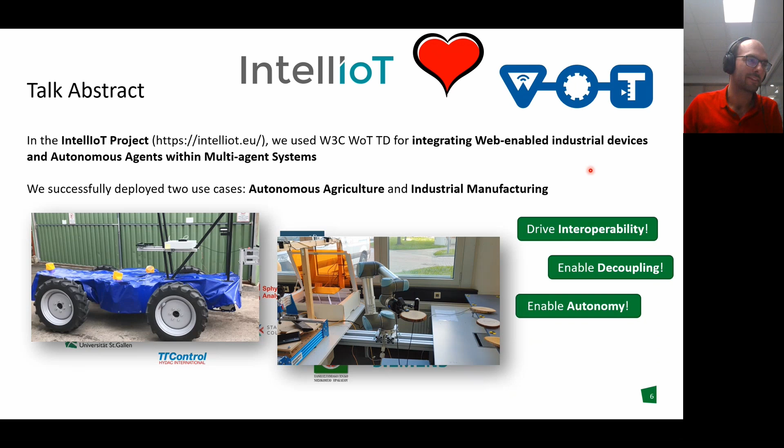So as an introduction, I'll show you the most recent videos. This is the video from last week, the most recent videos as outputs of this project. What you're seeing here is not the Postman interface, that's not the interesting part.

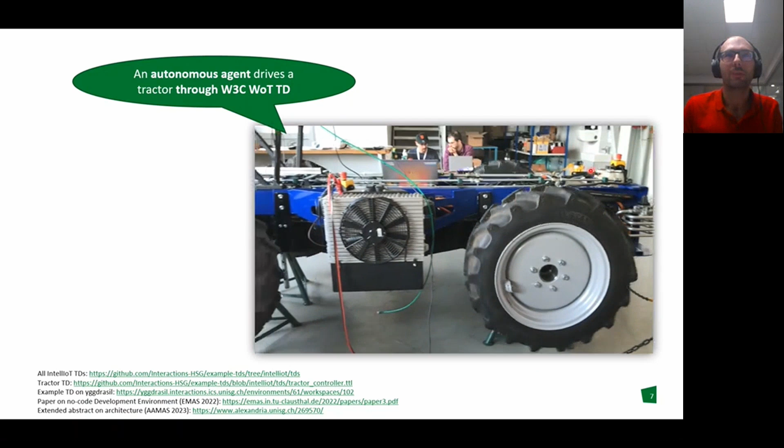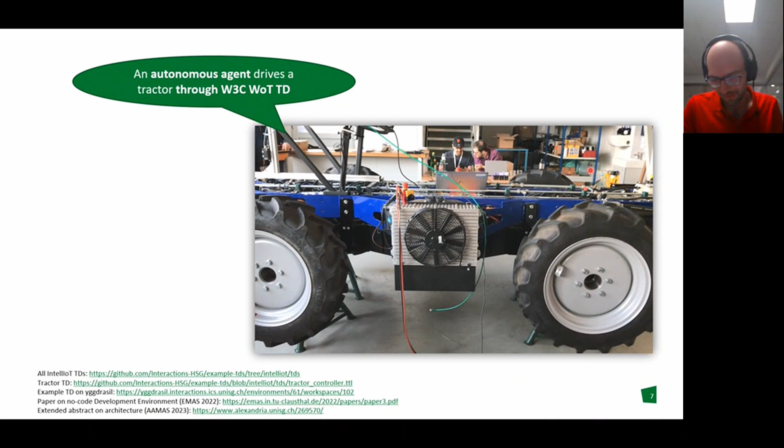What you can see here is our successful integration of an autonomous agent that drives a tractor through W3C Web of Things thing descriptions. One question I don't know is why the front left wheel doesn't move, so please don't ask me this. This tractor is up on the scaffold, so it's not actually driving, but it is following GPS coordinates.

This is enabled through things that expose WoT TDs. Some of these things are a tractor controller, the driver of this tractor, a waypoint service for resolving GPS coordinates, for giving us the next waypoints, for resolving fields to be harvested to GPS coordinates. An AI service, a local service that enables the tractor to go around obstacles, a journaling service, and a human-in-the-loop service that kicks in when the AI service fails.

Okay, so this is the, and there's many more, right? If you want to look at all the TDs that are active in this scenario, down here is a GitHub repository with all our IntellIoT TDs that you are free to browse.

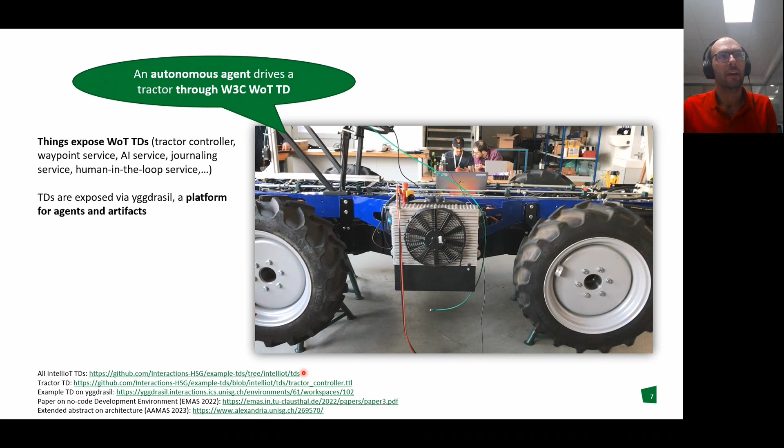These TDs are then exposed via a platform for agents and artifacts that we refer to as Yggdrasil. I can show you a quick demo of how this would work.

So over here you see the Yggdrasil platform, a specific workspace in that platform, and this workspace exposes, for instance, the action affordances make artifact, which tells us that I can create an artifact at this workspace. Some such artifacts are already created. One of these is a robot in our laboratory. So if I go and dereference that robot, I get a thing description of that robot.

This enables me to steer this robot. The actual TDs that we were using in IntellIoT, the tractor TD is linked from here, and all the other TDs are available, as I was saying.

Now, what is interesting about our project is that what we did was we discovered these TDs at runtime. So they were registered in this platform at runtime, and then we discovered them through a no-code development environment.

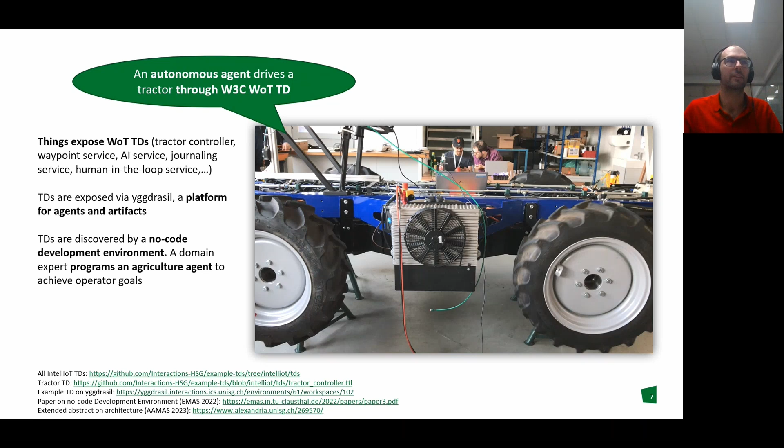So our challenge, our goal was to enable non-programmers to be able to program agents against W3C WoT TDs. We call these domain experts. This could be an industrial engineer, it could be a farming engineer, but it's someone who is comfortable with the domain, comfortable with the terminology of GPS, of driving a tractor, of harvesting, things like this. But this person is not comfortable with coding, and I'll show you what we did there.

Finally, at runtime, an operator then issues goals, a goal such as harvest field 5, and these goals are taken up by an agent. Then the agent takes over the coordination between these different things. So the agent will say, hey, tractor, go over there. And then the tractor will try to go over there.

If it doesn't, it will tell the agent, I have a problem in my field of view, there's a tree. The agent will tell it, go ask the AI service what to do. The tractor will go to the AI service to ask what to do, and if it's successful, it can circumvent the tree. If not, it can escalate to the human-in-the-loop service.

In this case, a partner of ours opens a virtual reality connection, and a robot and a human actually drive the tractor around the obstacle. So there's many more components here that I'm not focusing on.

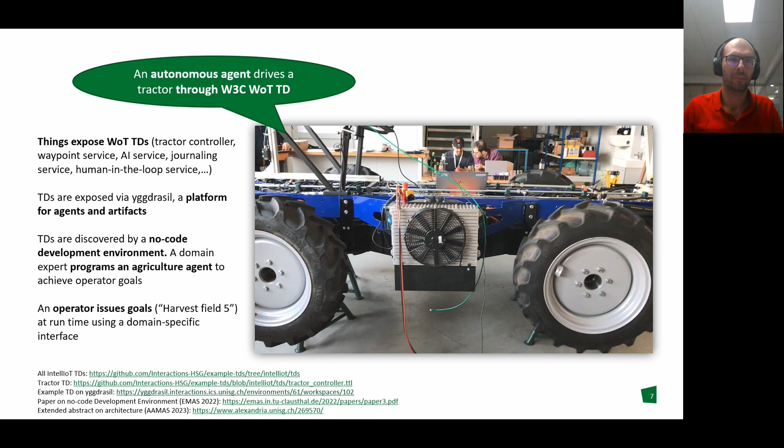I will show you the main points from the paper about the no-code environment in a few minutes. We have an extended abstract at the AAMAS conference in London in a month on this overall architecture, on our overall proposals towards this architecture. I think the slides will be shared, Ege or Cristiano, and the video anyway.

So I'm transitioning from the agriculture to the industrial use case, the second interesting use case in this context. This looks exactly the same as before. This was our intention, right? That on the system level, on the architecture level, they look homogeneous.

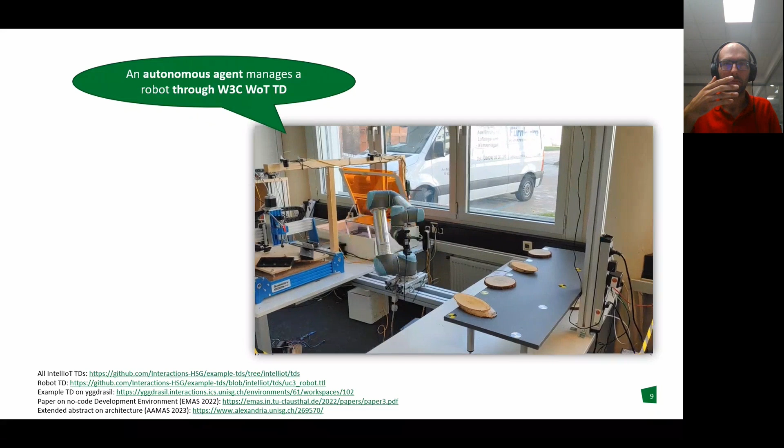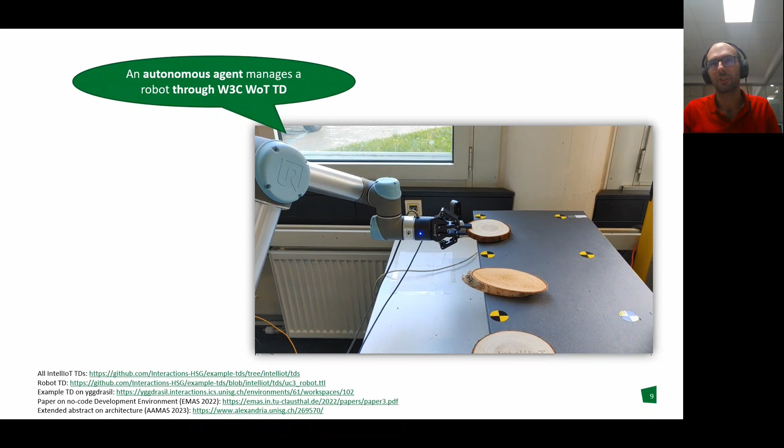In this case, somebody creates a goal of engraving something into a wooden plate, and then this wooden plate should be selected. An inline machine learning system tells the robot where to grab this thing, which is not our component, but somebody else's. But you see the camera over here at the robot gripper. And then this item, this wooden plate in this case, is selected.

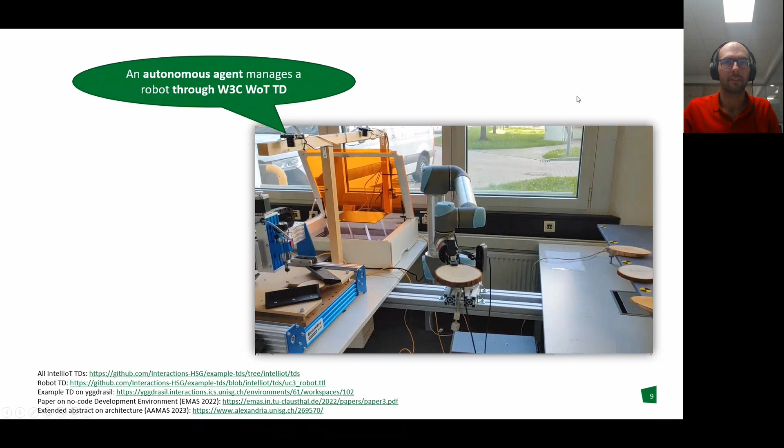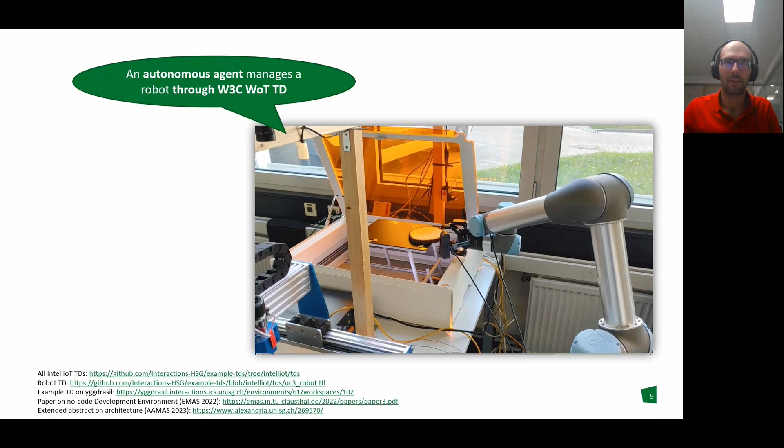It's put over here into the engraver. Then this custom designed platform, designed by one of our colleagues, will insert it into the laser engraver, and then this thing will start engraving the text that we wanted.

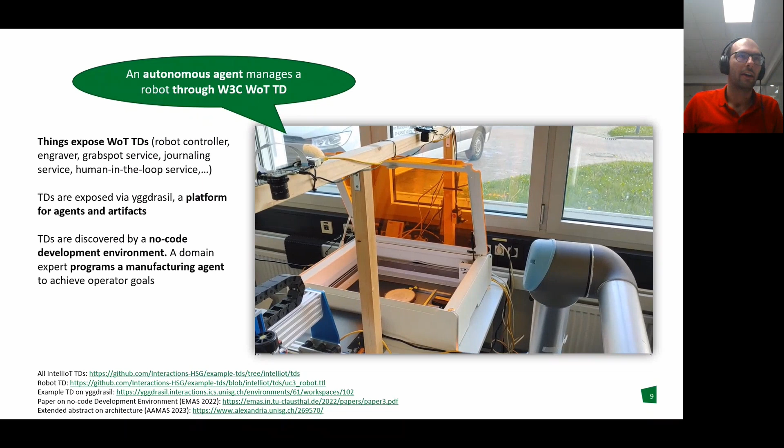So essentially, this is again the same storyline as before. The things expose WoT TDs, it's different things now: the robot controller, the engraver, the grabspot service, again the journaling service, and again a human in the loop service. They are again exposed via the same platform, again discovered by a no-code development environment, and again programmed against by a domain expert.

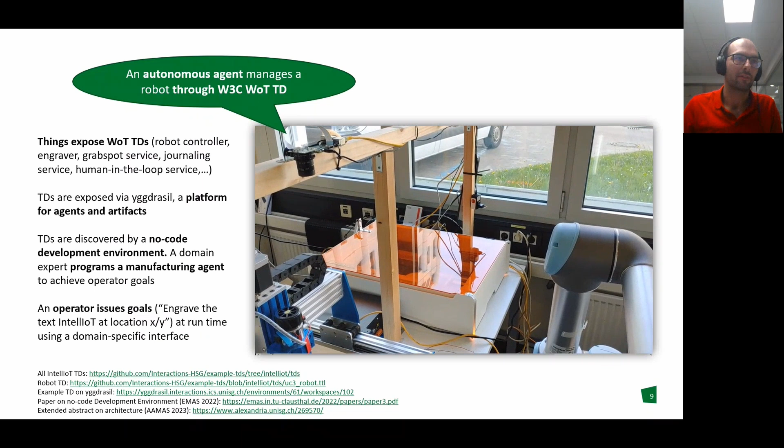At runtime, an operator issues goals. Just this time, the goal is like engrave the text IntellIoT at location XY. Okay, so here you see the engraving now.

So this is the introduction, and both these use cases bring together lots of different devices, and in the context of this project, the different non-functional requirements by our project partners. This was what was driving our main insights, I would say, and I'll share some of these now.